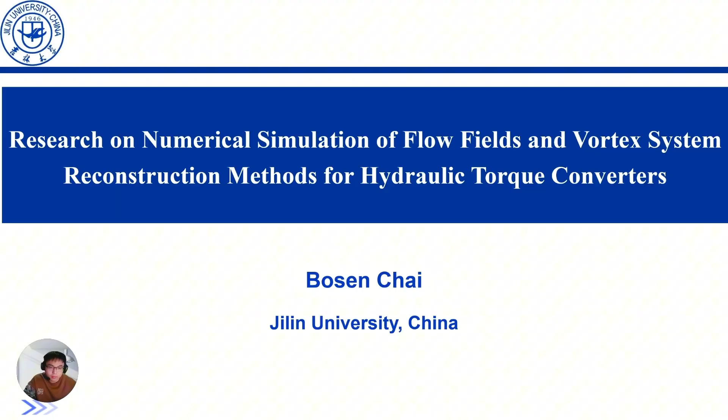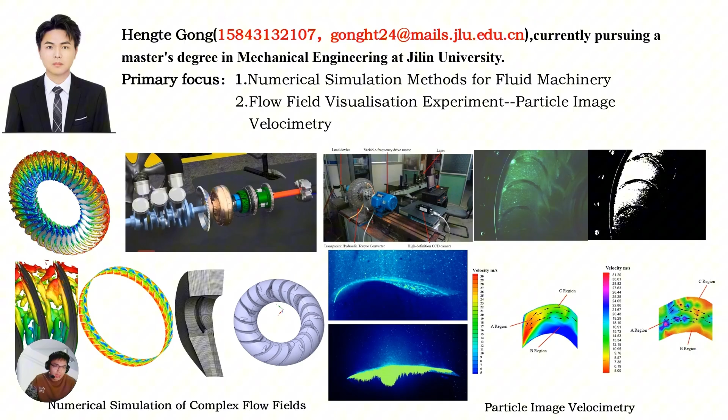Now, a brief introduction about myself. I'm studying for my master's degree. My research focuses on two special areas: CFD simulation, using computers to solve complex flow field problems, and PIV experiments, using lasers and cameras to visualize flow. The image at the bottom shows the test rig I built and the flow particle captures. I will explain this in detail later. These are the foundation of today's report.

To make my presentation clear, I have divided it into 5 parts. The first is background of study. Why is this research important? The second is simulation methods. How did we calculate the flow? The third is PIV. How did we prove our calculation is correct? And vortex analysis, comparing different methods to find the vortex. The last is conclusion. What did we learn?

Let's start with part 1, background of study. Please look at the machine in figure 1. This is a loader. It is a very common machine in construction. Inside the machine, this is a key component called the hydraulic torque converter, or HTC. Why is the HTC so important? It acts like the heart of the transmission system. It transfers power from the engine to the wheels using liquid oil. If the HTC is efficient, the machine saves fuel. If the HTC is smooth, the driver feels comfortable.

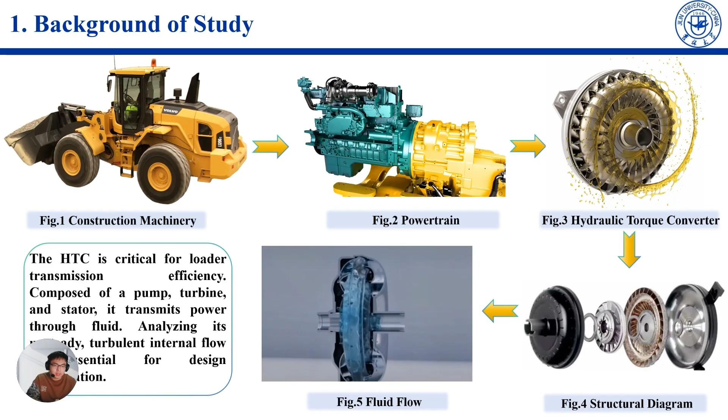However, designing a good HTC is very difficult. Why? Because the flow inside is extremely complex. Please look at figures 7 and 8. The liquid inside moves at a very high speed. The internal pressure changes rapidly. We call this high Reynolds number turbulence. As the liquid flows through the curved blades, it doesn't move in a straight line. It swirls, it separates, and it creates vortices.

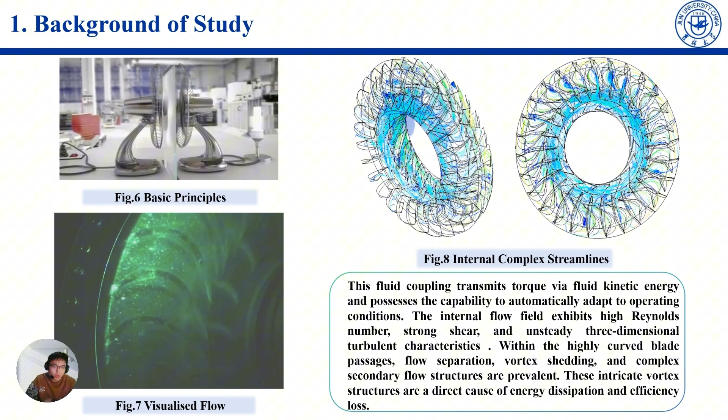What is a vortex? Think of it like a small tornado inside the liquid. In figure 7, you can see these complex vortex structures. These vortices are energy killers. They consume energy, which lowers efficiency. They create noise and vibration. They can even damage the blades. So our goal is simple but hard. We need to see these vortices clearly. Only when we see them can we fix them.

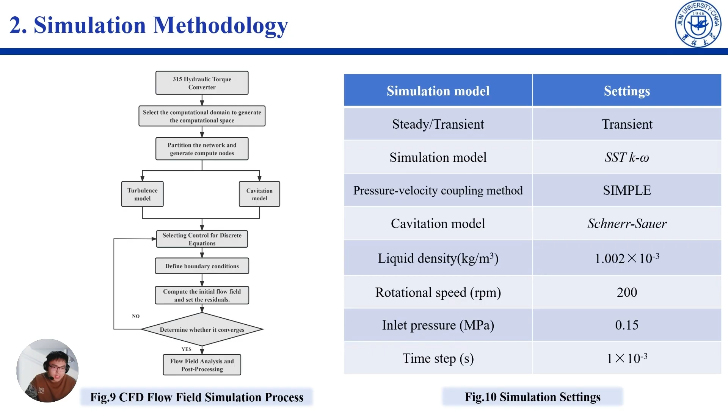Next, let's look at the mesh. A good simulation needs a good grid. We use the hexahedral mesh. These are brick-shaped cells, which are very accurate. We made the cells very small near the blade surface to capture the friction. This chart shows our grid independence test. This is very, very important.

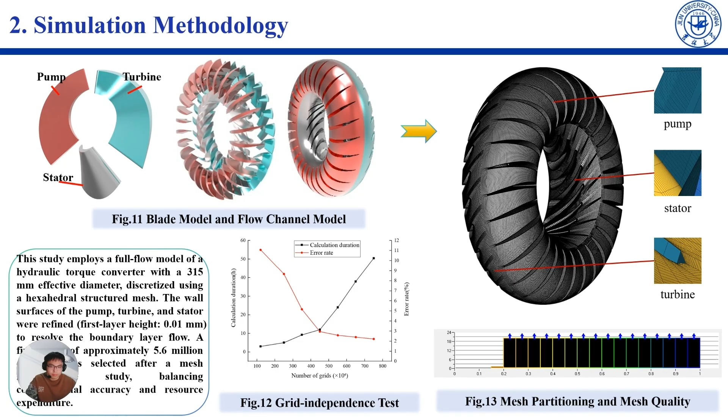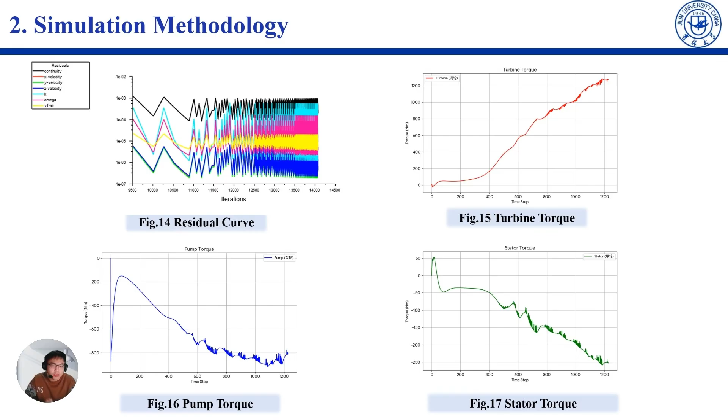How do we know the calculation is finished? We look at the residuals. In figure 14, you can see these lines going down and staying flat. These are below 0.001. This means the solution is stable. We also monitor the torque of the turbine, pump, and stator. Look at these curves. In the beginning, they go up and down, but after some time, they show a regular periodic torque pattern. This tells us the flow field has fully developed and is ready for analysis.

Now, we have the simulation results, but can we trust the computer? This is the question. We must verify it with a real experiment.

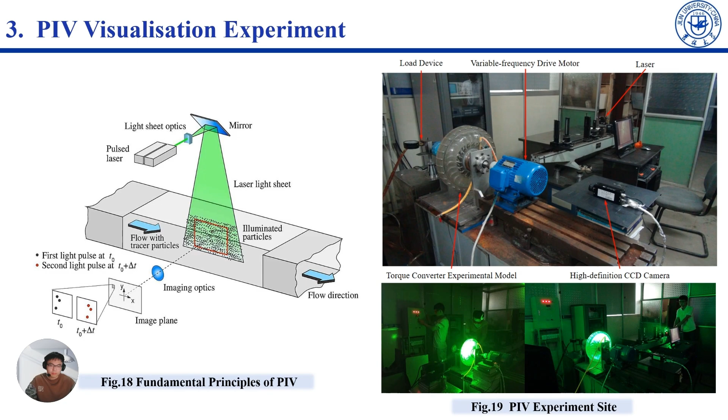Before measuring, we had to solve a big problem: optical distortion. Because the model is curved and filled with liquid, the image looks bent, like looking through a glass of water. To fix this, we performed external calibration. We marked the outer edge of the model in the mesh with the real physical size.

For example, the number 1188.81 you see here is a calibration parameter. This ensures that every pixel in our photo corresponds to the actual physical lengths. We measured at two specific positions, z equals 0 and z equals minus 25.

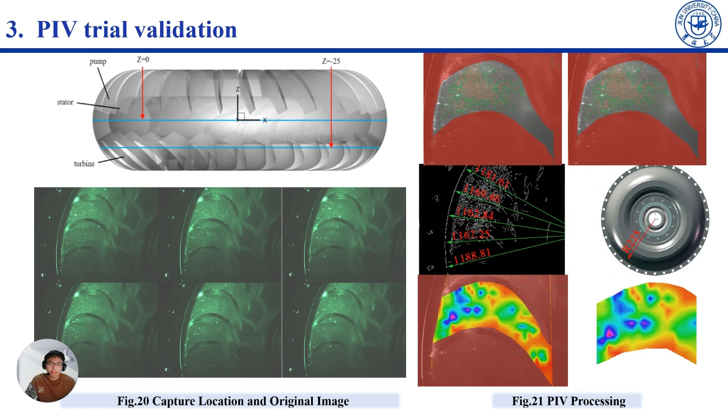This is the most important figure. This is the moment of truth. Left image, our CFD simulation result. Right image, our PIV experiment result. The color represents speed. Red is high speed, blue is low speed. Let's compare them.

Region A, this is the tongue inlet. The liquid is shooting in very, very fast. The simulation predicted about 30. The experiment measured 31.2. The difference is very, very small. The shape of the red zone is almost identical.

Region B, this is inside the channel. The flow separates here, creating a slow zone. Both images show a clear blue band. The speed is between 5 and 9 in both cases. Conclusion: because the colors, shape, and the numbers matched so well, we can say our SBES simulation is accurate.

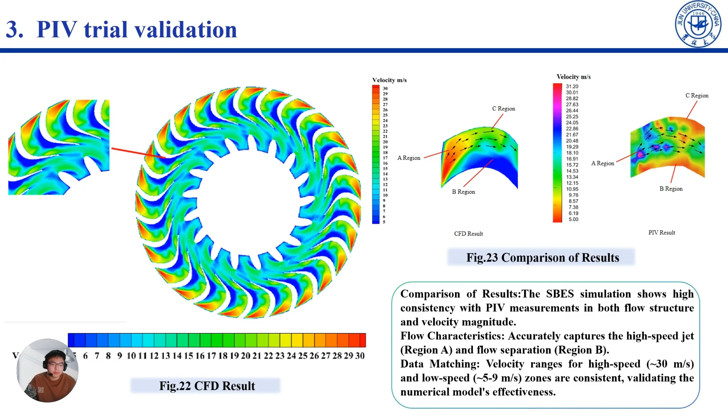Next, since the simulation is accurate, we can now use it to visualize the vortex. We compare the three methods, Q, omega, and our focus, the Omega-Liutex. Let's look at the overall structure. Far left, this is Q. Look at the green shapes. They look broken, like a disconnected sausage. It fails to show the full picture.

The middle is the omega method. It's better, but the structure looks very thin. Some connections are missing. Far right is Omega-Liutex. This is our focus. Look at this one. It shows a complex, connected, and dense network of vortices. It reveals the truth of the flow.

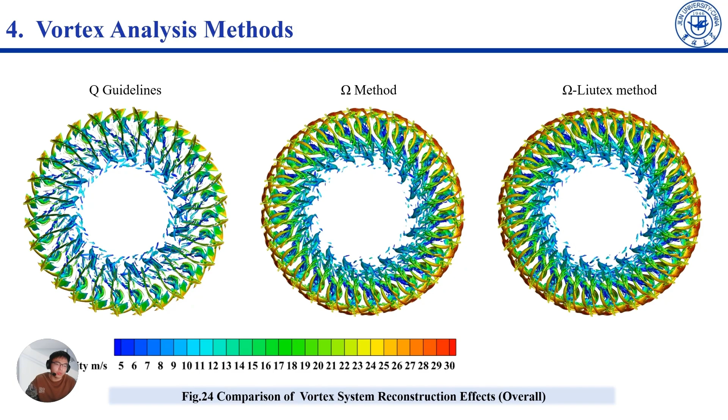Next, let's zoom into the pump. Please look at the entrance of the blade. Right image, Omega-Liutex. You can clearly see a corner vortex. It looks like a long continuous curve. Left image is Q. It shows almost nothing here. If we use the Q method, we might think there is no problem. But Omega-Liutex told us this is a vortex that needs fixing.

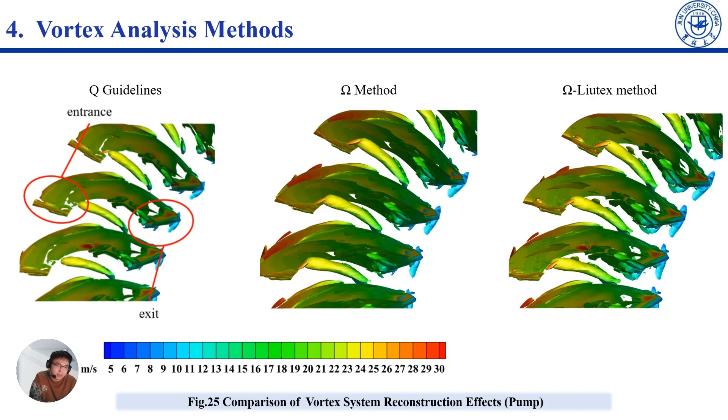Now the stator, the flow here is very, very messy because of the secondary flow. The Omega-Liutex method captures not just the big vortices, but also many thin weak vortices. It is very sensitive to details.

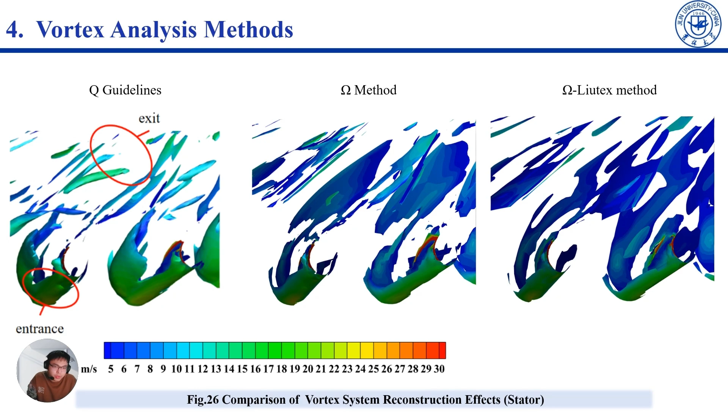Finally, the turbine here. We have wake vortices traveling behind the blade. This causes noise. The traditional methods, left and middle, that is Q and omega, show the vortex broken and disappearing quickly. This is not physically real. The Omega-Liutex method shows the vortex moving far downstream. This helps us understand where the noise comes from.

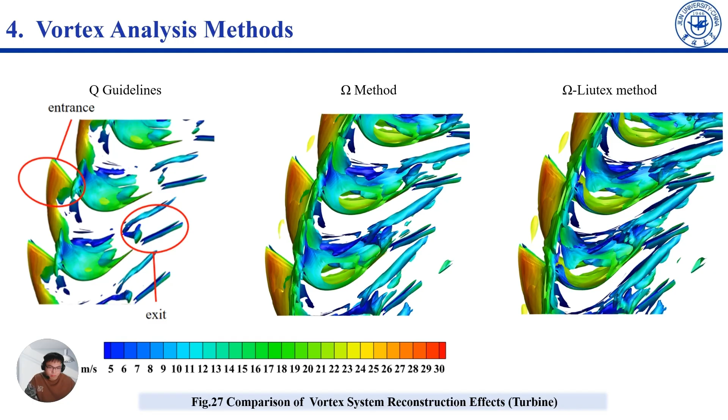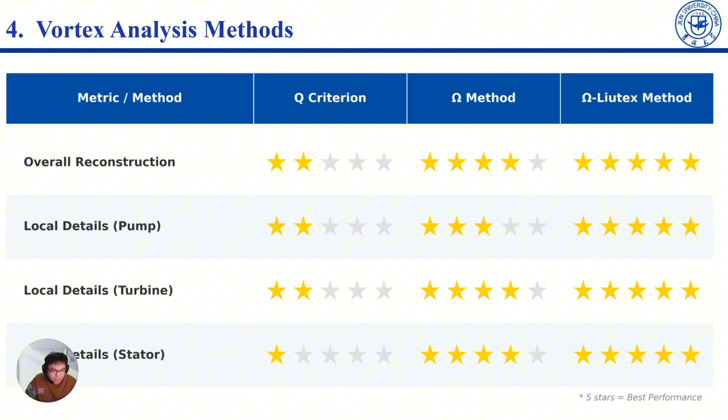In conclusion, our research has led to 3 key findings. The first is simulation accuracy. We proved that the SBES model is highly accurate. It matched the PIV experiment in both flow structure and velocity values.

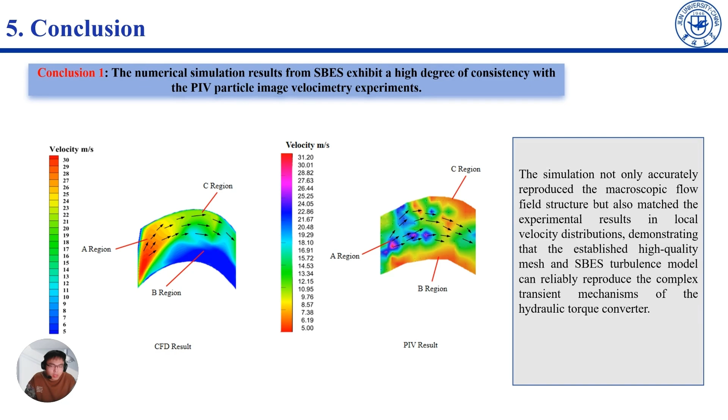The second is overall performance. We found that the omega Liutex method is most reliable. It's not sensitive to threshold settings and can reconstruct the most complete vortex network.

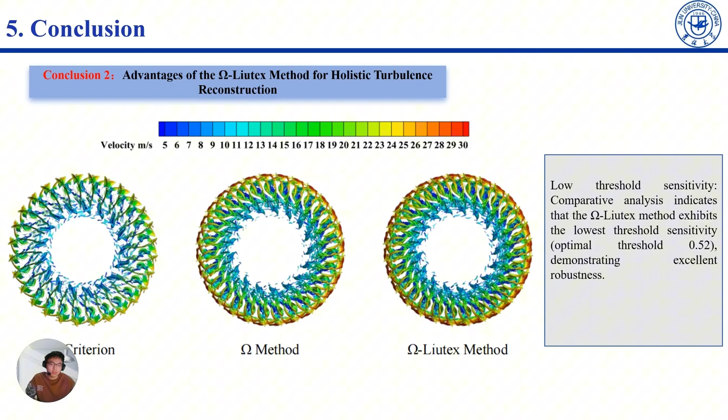The third is fine detail capture. We found that omega Liutex is superior at capturing weak and dynamic vortices, such as corner vortices and wake vortices. That is all my conclusion.